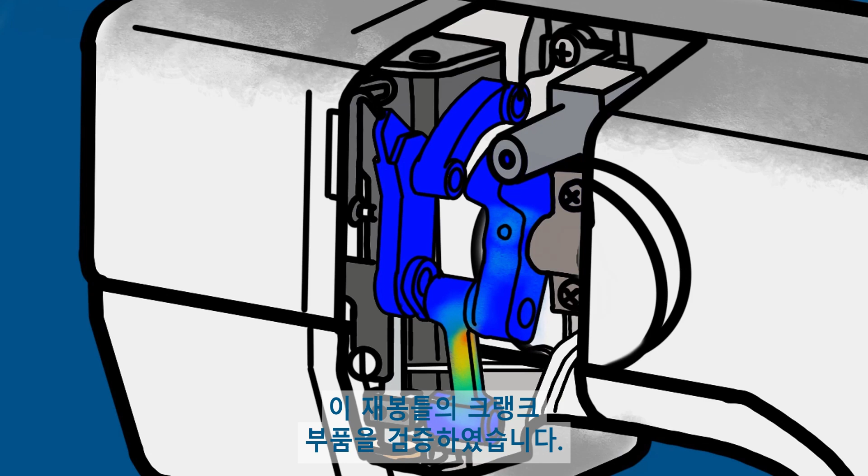Adam has an existing simulation study to validate the crank components of this sewing machine. While a linear static analysis in SOLIDWORKS Simulation provides good insight into the structural integrity, Adam needs more capabilities provided by the 3DEXPERIENCE platform to solve for the dynamic response from the inevitable needle break.

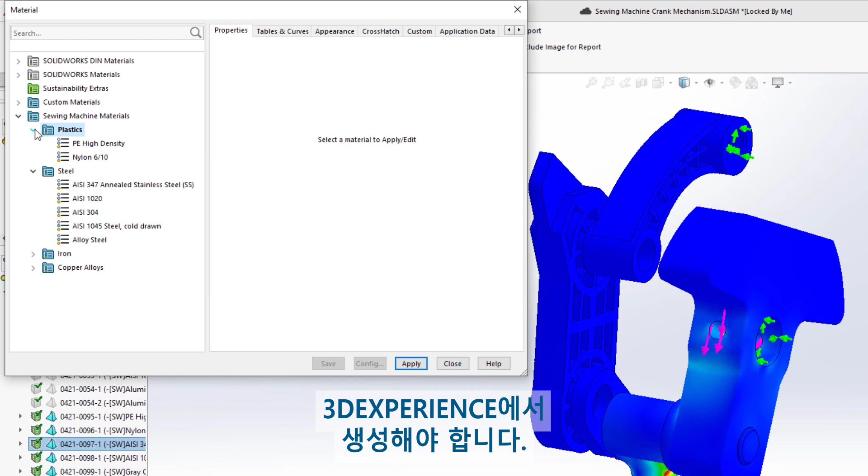Some of the sewing machine components are defined with custom materials, and they need to be created in 3DEXPERIENCE. To automate this task, Adam imports his custom SOLIDWORKS material library. This eliminates the need for the time-consuming and error-prone task of creating materials manually.

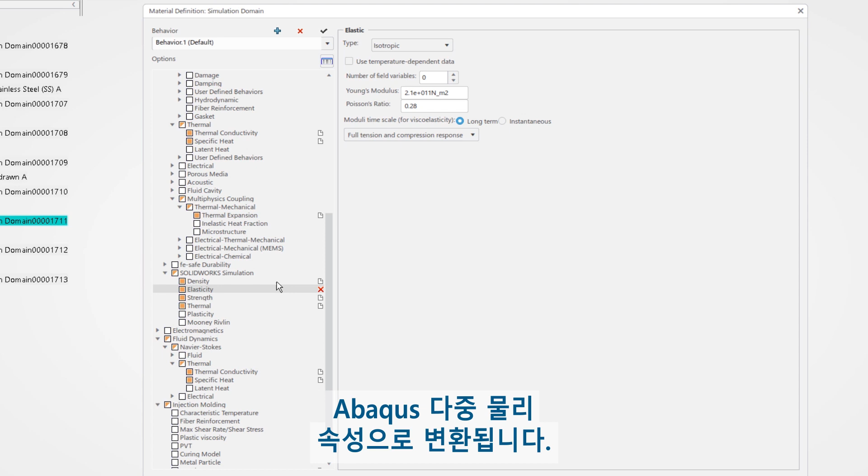In these new material objects, the SOLIDWORKS simulation material properties are maintained and converted to Abaqus multiphysics properties. These are leveraged to solve for additional real-world phenomena. For the case of the needle break, Adam only needs to add damage properties.

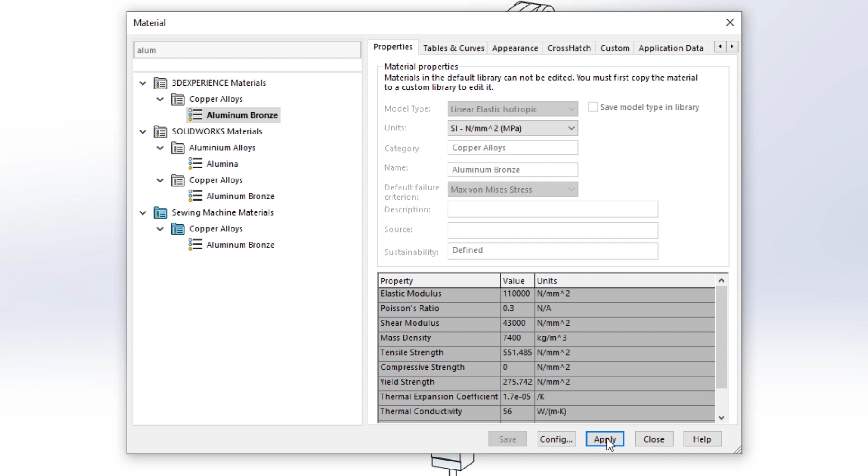Back in SOLIDWORKS, Adam has access to the centralized 3DEXPERIENCE material library, so he can ensure he's defining the correct materials. Additionally, when he transfers the simulation study to the platform, the materials, along with the loads and boundary conditions, are automatically mapped to the newly created structural simulation.

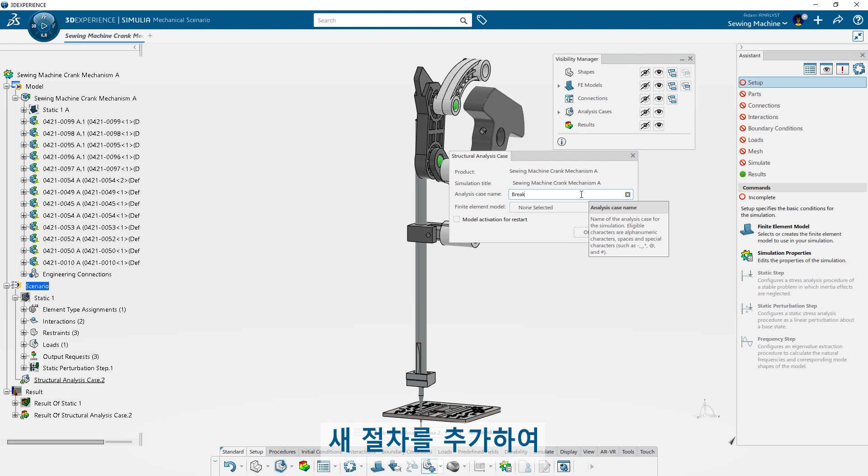With this, Adam can easily extend his simulation workflow. Adam builds on top of the simulation by adding a new procedure with an explicit dynamic step, so he can solve for the needle break and the response in the sewing machine crank.

To reduce the calculation time and eliminate the need for Adam's computer, he runs the simulation with the included cloud license. The simulation can be monitored from any device with a web browser, so Adam can easily track the convergence and see when the results are available.

While viewing the results, Adam identifies an opportunity to optimize the shape and mass of the needle bar link. He defines the SOLIDWORKS dimensions of interest as parameters and selects them in the new parametric design study in 3DEXPERIENCE.

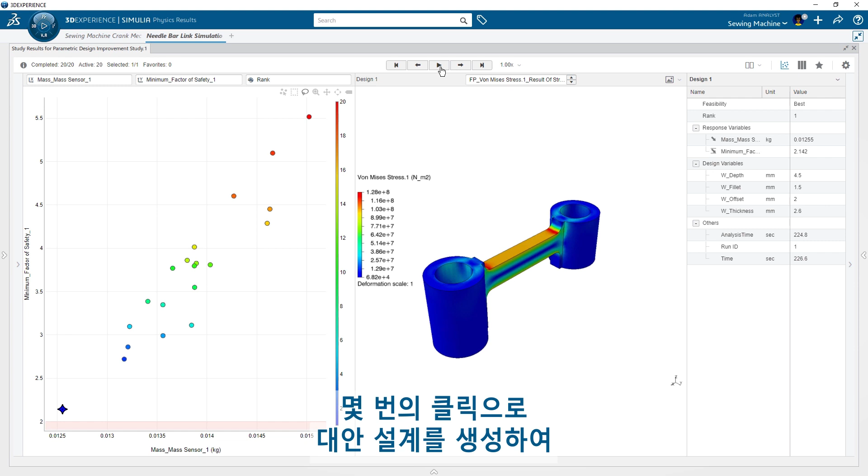With goals of minimizing mass and stress, the best design alternative is identified for him. With a couple clicks, he generates the alternative design, so he can perform additional analyses and update the SOLIDWORKS assembly with the optimal part model.

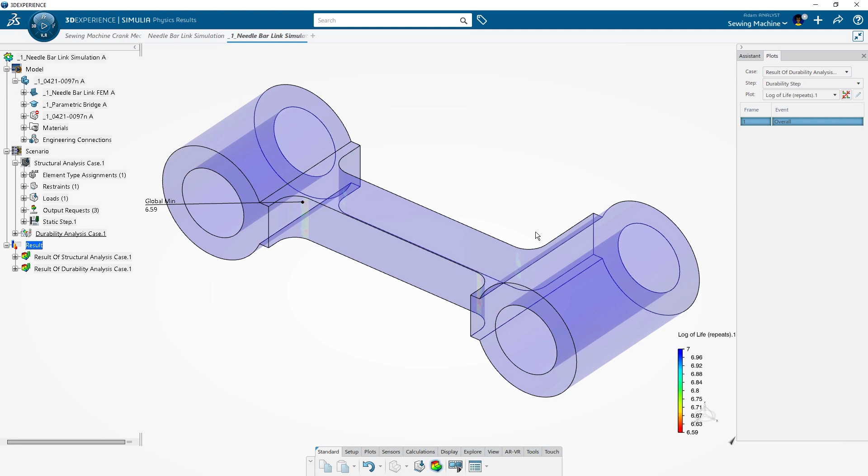To evaluate how long the link will last, Adam creates a durability analysis case and defines the fatigue loading. The results identify where and when the link will fail first. But how can he increase the life without changing the geometry?

He modifies the surface finish in the weak areas only, which minimizes the amount of manufacturing necessary to create a long-lasting part. All of Adam's work is managed and automatically backed up on 3DEXPERIENCE.

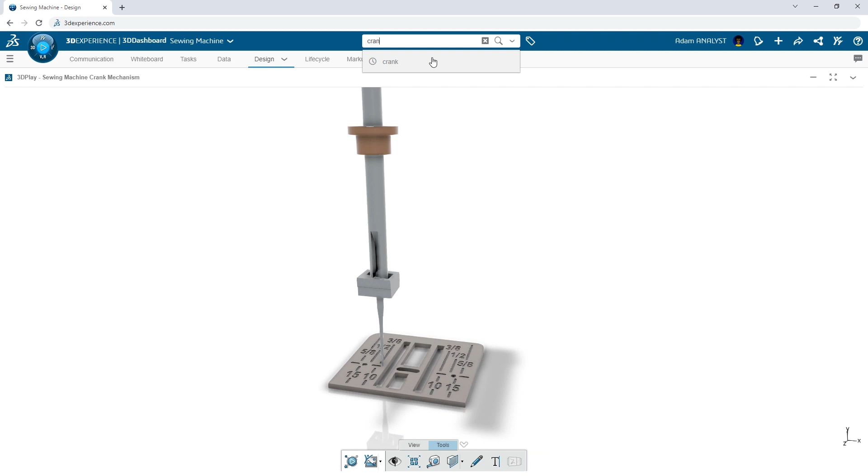Furthermore, he doesn't need to spend time creating reports of his simulations. Since all the data is on the platform, the details can be easily viewed in 3D in a web browser. Comments, notes, and changes can be shared with other stakeholders in the same cloud-based environment, streamlining communication throughout the organization.

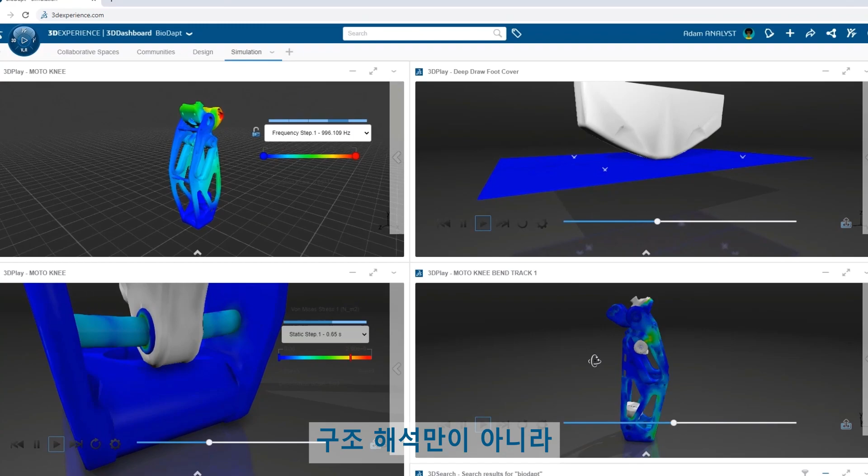And this rapid product development and validation doesn't stop at structural analyses. Take on fluids, plastics, electromagnetics, and motion studies as well. How will you expand your horizons with advanced simulation and 3DEXPERIENCE Works?